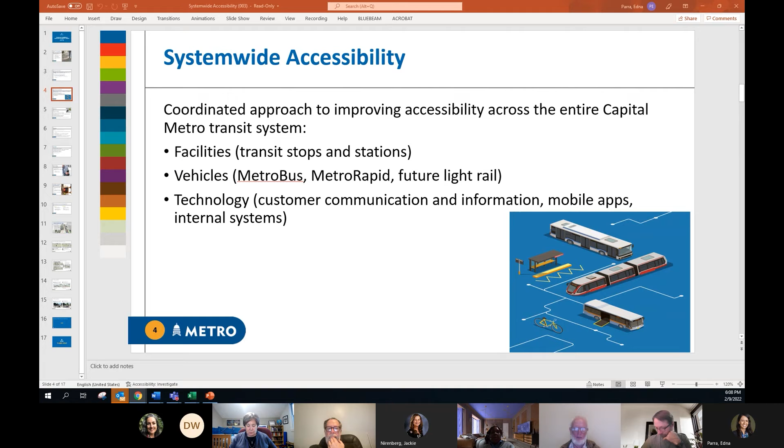Moving on to the next slide here. Let's take a little bit of time on facilities. So when we talk about facilities, we're talking about the built environment, and that's where the pedestrian meets the infrastructure. It's important to incorporate accessibility at concept and design.

When you're going to build out any of the things we're going to discuss, it's critical that accessibility be something that's dealt with on the forefront, because it's very difficult to retrofit and go back and try to readdress things. This can include pedestrian features such as sidewalks, shared use paths, traffic signals and crossings.

In regards to Capital Metro's own buildings and facilities, our facilities are readily usable and accessible to people with disabilities, and they're accessible to the public. We're able to host public meetings that are open to all manner of individuals.

Drilling down a little bit further on facilities, sidewalks are critical because access to transit begins and ends with a sidewalk. You need to make sure those sidewalks are ADA compliant, they have the appropriate widths, and most importantly, that you have sidewalk connectivity. One strip of sidewalk in isolation is not enough — you really need to look at sidewalks as something that's a connected network.

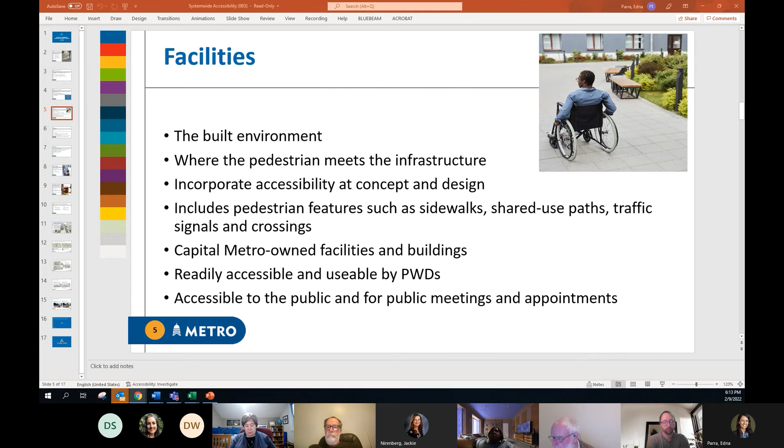Looking at our vehicles - our light rail or our metro bus vehicles - all of our vehicles on the fixed route side are 100% accessible. We were the first transit agency in Texas to go 100%, and the third in the country. We incorporate all the necessary accessibility features in our vehicles, such as ramps and audible announcements, lifts for our express buses, and securement systems. With our new electric vehicles, we're featuring the Quantum system, which is a reverse facing securement system that can be utilized without the involvement of the operator.

On our commuter rail and light rail, we will have level boarding rail platforms. It's important to be intentional about design when we're looking at these vehicles as part of the procurement processes. I've been purchasing vehicles over the last 10 or 11 years that I've been with the agency, and I participate in each one of those to ensure we've got all the right features exactly the way we want them for our local community.

We go out and work with a couple of organizations when we're trying to spec a vehicle. So we might take a bus out and try a couple different options in order to get feedback on what the public actually wants, in particular with things like securements. Once you get that feedback, you want to design a responsive scope - something we do on the fixed route side, and that'll be important going forward as we do the same on the light rail vehicle side.

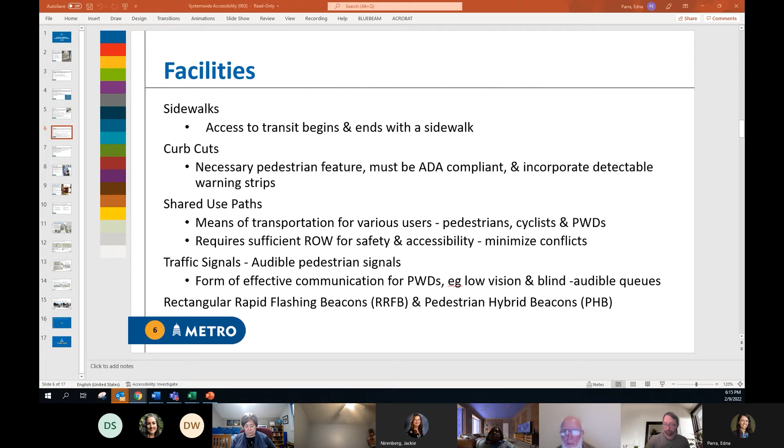Technology is another important piece. Quite honestly, technology is the type of thing that can break down barriers and eliminate some of the existing challenges that people may experience, whether dealing with the built environment or others. There are customer information systems out there that can really improve the journey - mobile apps and technologies that can provide information about the built environment, wayfinding and navigation, especially if a person is low vision or blind and cannot see signage.

And particularly about information about the built environment - how can you provide information to individuals in wheelchairs about what they might encounter as they're trying to traverse a journey?

And that just gives people a sense of ease and confidence in using our system, and that's what we want people to have.

However, regardless of all the things that we try to improve and focus on from an accessibility perspective, whether it's vehicles, facilities, or technology, there will still be individuals in our community who won't be able to use our fixed modes because of their disability and how they function with it. Recognizing that, we have the MetroAccess program that serves as a safety net for individuals with disabilities who aren't able to use those modes. It'll continue to remain a critical piece of our overall portfolio, making sure people with disabilities have transit access commensurate to their abilities.

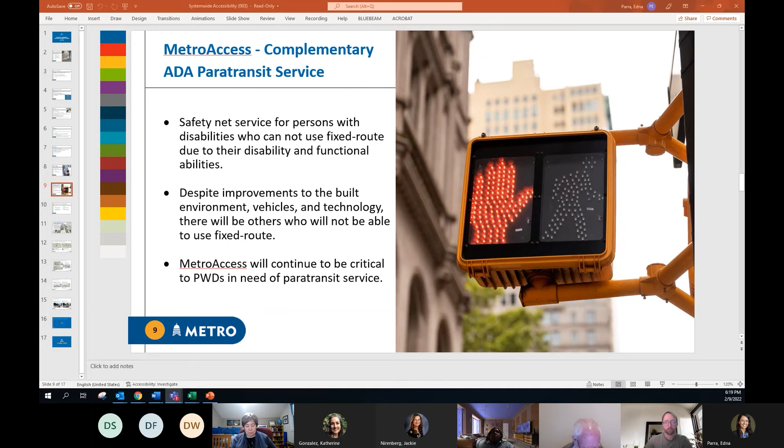Next slide, please. All of this is to say, looking forward, what could a system-wide accessible transit system look like? We could see fully accessible paths of travel across the built environment to transit facilities with accessibility features, vehicles designed for the future with all functional abilities under consideration, operating with precision technology. And then, perhaps my favorite, customer information systems that can provide universal access to improve the journey and help people complete their trips at every step of the way.

At this point, I'm going to introduce Jackie, whom I'm sure you all know well, to talk a little about how this is all coming together in the work we're doing on the Project Connect side. Thanks, Martin.

Hi everybody, again I'm Jackie Nierenberg. We've had a number of community design workshops at which accessibility has been the focus of our conversations. All of this is to develop a system that is accessible to all, with vehicles designed for the future and for all functional abilities. When we design for the folks who need the greatest access, we design for everyone—customer information systems and apps that facilitate universal access to complete the journey with information at every step. So just making the experience as easy and accessible to all as possible.

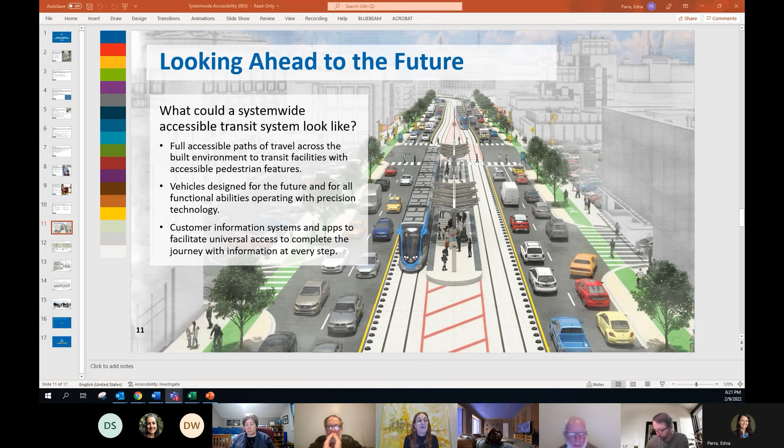So the first community design workshop we had—these are an extension of something we developed called working groups, which are geographically specific working groups along each section of the Project Connect light rail corridors. This was part of the Blue Line working group, and some of you may have actually participated.

This was for the Pleasant Valley Riverside Transit Plaza, where we explored a couple of design options for how we connect people to the Metro Rapid service from the Blue Line and vice versa, since both will be converging at that nexus. Option one explored a landscaped bridge with Pleasant Valley Road above the transit way, Metro Rapid stops located north of East Riverside Drive, and through traffic remaining on Pleasant Valley.

Option two was the at-grade Transit Plaza option, which meant the Blue Line light rail would operate on the street level, and the Metro Rapid Transit Plaza would be on East Riverside Drive, with Pleasant Valley through traffic diverted via an elongated roundabout loop.

We got a lot of very interesting feedback on access there, mostly about the length of time it would take to use option two versus option one. With option one, we got feedback about how people would get underneath to access the Blue Line—would there be elevators or escalators involved, and the problems associated with each. So a lot of interesting feedback, a lot of diversity of opinions, and both options are being reviewed based on the input we received.

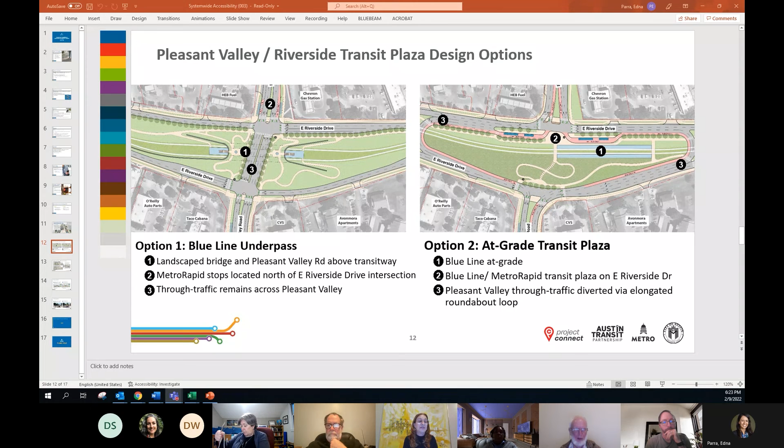The next community design workshop we held was for the North Lamar Transit Center. Again, this is a nexus of a lot of services coming together in one place, and we're trying to figure out how to make the experience between these services easy and pleasant, and above all, safe for people.

So you mean option one was preferred? Actually, option one was preferred by most.

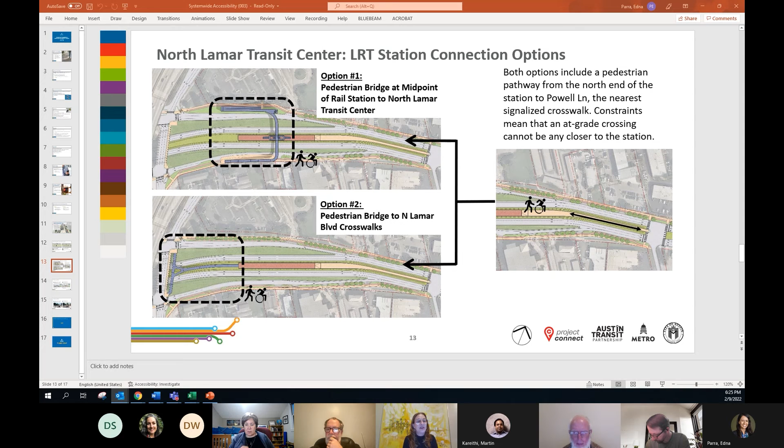This was the Drag—another tricky situation. We did this amazing workshop between variants, and we were able to do it in person at UT. Some of you may have attended. We had a huge turnout—not only students, faculty, and staff, but also community members, business owners, etc. Lots of stakeholders interested in what's going to happen in the Drag, which is a super constrained area.

We talked about two design options. One was to include both traffic bus lanes in addition to the light rail, and try to fit everything into that one space.

The other option was to remove vehicular traffic and make it more of a transit mall. We had a lot of good input, and it's interesting that students really liked the transit mall option. I think they saw it as a safer way to access the university, the West Mall. We had a variety of opinions from staff and community members. Obviously, business owners were concerned about how this impacts their business. So there's a lot to be considered, and again, no decision has been made. We're taking both options forward to 30% design, but we got some really good input on what people consider to be safe.

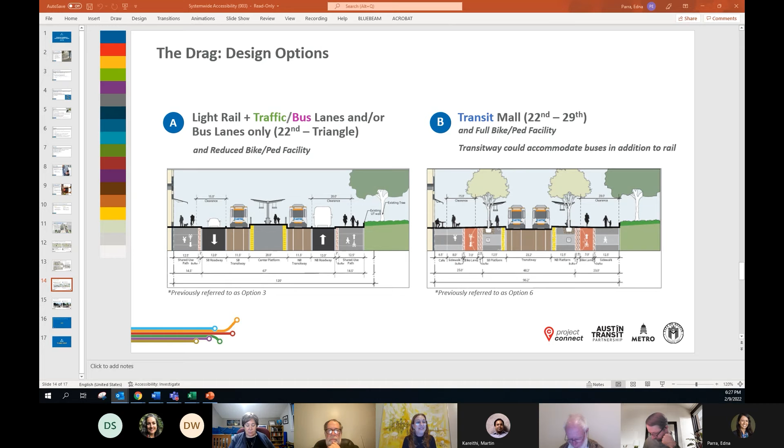I think we have one more slide. The last slide shows renderings of what those options could look like. So we were able to show those and give people a better idea of what we were talking about when we moved to the transit mall option versus including vehicular traffic.

On the transit mall, and with these different meetings we had, safety of course is paramount. But with the transit mall, you get so much additional space. We hear from people with accessibility needs that you can provide more space for pedestrian access, going back to the multimodal facilities and shared use paths. With that kind of space, you minimize conflicts that might exist between cyclists or folks with any manner of disabilities.

When you're looking at the bridge, whether it's the North Lamar piece or the discussion we had at Riverside, we had a lot of comments about elevators and whether there are alternatives to elevators, just because of all the issues we have with those, and ways for folks in wheelchairs, whether power or manual, to get down and through those things. We've been fortunate to have some really good drill-down sessions, some very specific to just accessibility, and we continue to hope to do that, getting specific feedback on accessibility for members of the accessibility community who walk, wheel, and cane through these environments.

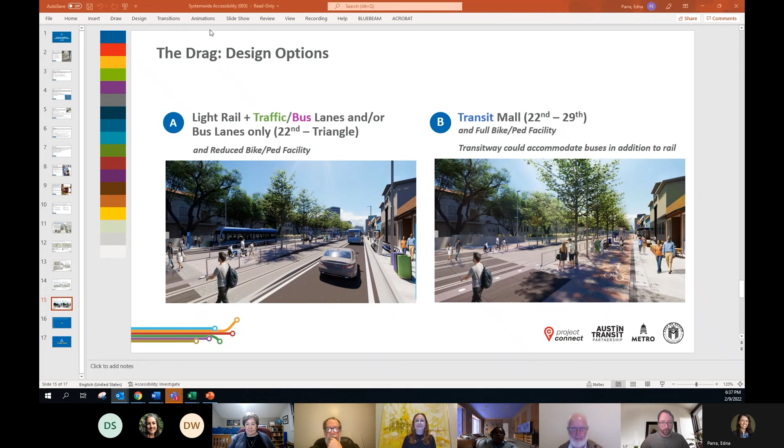I think I'll share my screen. Oh, where's my little share screen deal? Yeah, I think I stopped sharing my screen, so you should be good to go. Let me know if you have issues. Oh, or there it is. I see it. Sorry, okay. Was on Zoom earlier today, and it messes with me. Okay.

All right, so I'm here to give you all the latest.

Other grants could flow in, people could follow the money, right? That was really important for transparency's sake. And just to give you an idea of what buckets, because it gets kind of confusing, who does what, and honestly we're still working through roles and responsibilities. But to put a broad brushstroke on it, the Austin Transit Partnership is in charge of implementing the Orange Line, the Blue Line, the Downtown Tunnel, and the Green Line, which will be the future commuter service from downtown to Colony Park, and the infrastructure and facilities that go along with those. Capital Metro still operates the Metro Rapid Service, the Metro Express, the neighborhood circulators called Pickup, Customer Technology, and the Red Line. The City of Austin's domain is the anti-displacement investments, handled by the city's Housing and Planning Department, utilities relocation, permitting, and right-of-way. That's at least a high-level overview of our roles and responsibilities.

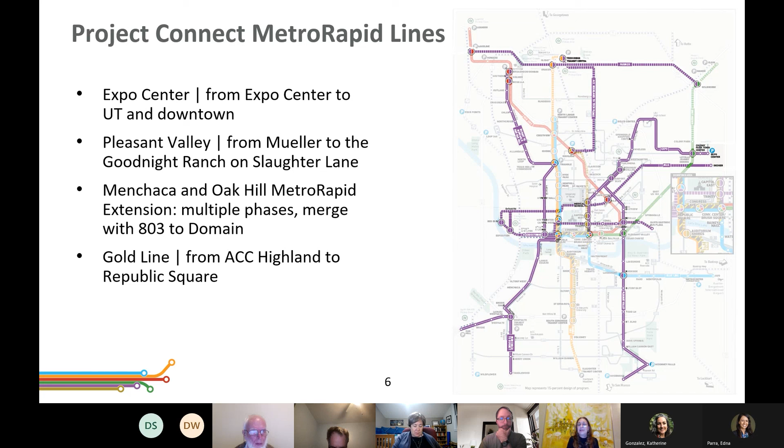I don't know if I need to go through these Metro Rapid lines, but we'll talk a little bit more about Metro Rapid, and Katherine is going to talk more in depth about those projects, so I'll just cover that all.

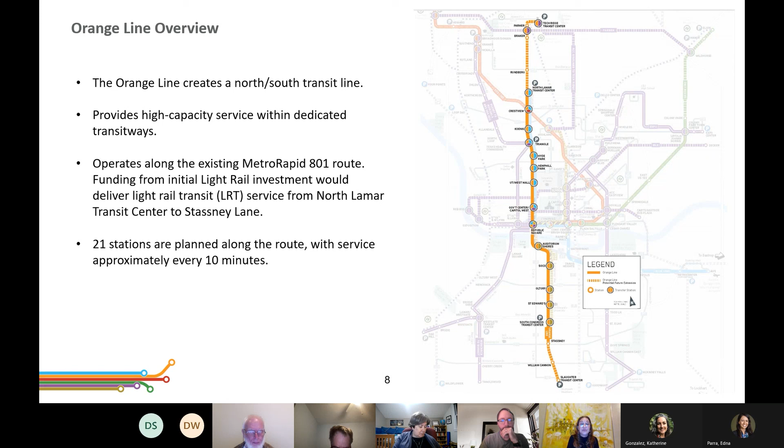Just a reminder about the Orange Line: it's the north-south transit line providing high-capacity service. It operates along the existing Metro Rapid 801 route, and funding was from the initial light rail investment. It would deliver transit service from North Lamar Transit Center to Stassney Lane, and includes 21 stations with service approximately every 10 minutes or less.

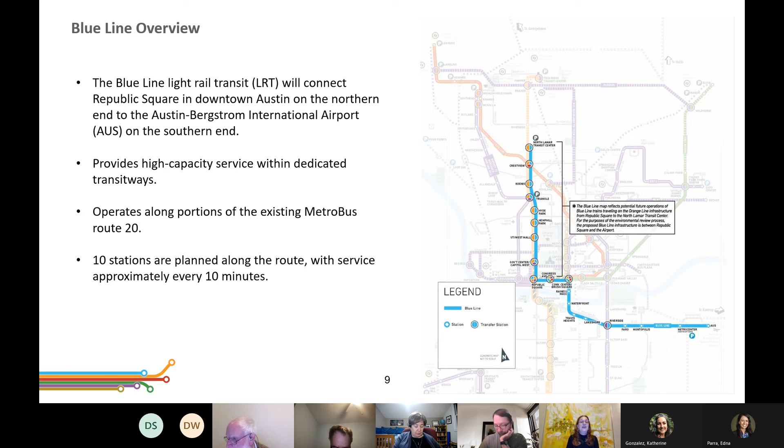And the Blue Line, as a reminder, connects Republic Square in downtown Austin to the Austin-Bergstrom Airport. It provides high capacity service, operating along portions of the existing Metrobus Route 20, with 10 stations and service approximately every 10 minutes or less.

I wanted to show the timeline of where we are with the Orange and Blue Lines. We're still really early in the process, and I want to emphasize that we have ongoing community engagement and involvement. We're always open to feedback.

We have a feedback email, feedback@projectconnect.com, and we're always open to coming and giving updates to committees like ours, but also neighborhood groups and civic organizations. We've even done updates in people's living rooms for smaller organizations. So we are open and available.

I mentioned that in the summer we're achieving two major milestones: the 30% design mark and the draft environmental impact statement. So we are right between that scoping and that milestone this summer, and then you can see how it all flows from there.

All the way down to the grand opening, which we expect to be somewhere around 2029, fingers crossed.

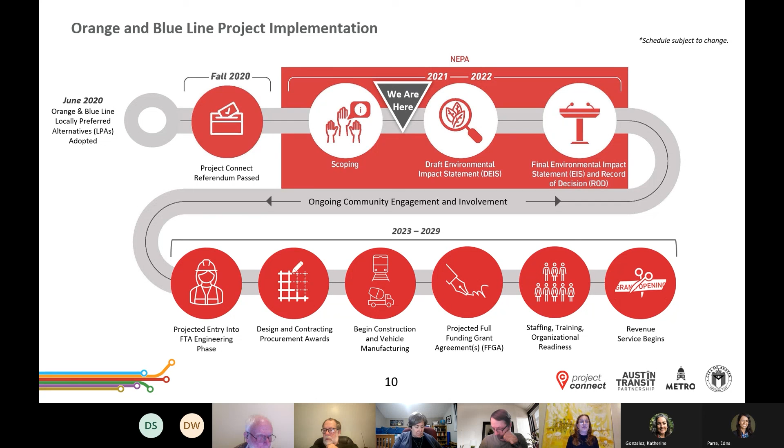A little bit about community engagement. We've done quite a bit, and it's been a challenge. Like the chair was saying, it's not ideal to engage on such highly technical and on-the-ground projects in a virtual setting.

But we've done the best we can, and now we're starting to supplement with our at-stop outreach and block walking and all the things that make the difference in connecting people to information, because we realize that most people do not engage with us at our meetings.

I will say the virtual meeting is probably going to stay in our toolbox, because we've gotten so much more participation, like triple the amount we had when we were doing meetings in person. It's just much more convenient for a lot of people, so it's likely to stay as a major part of our engagement effort.

But we still are missing people who don't have time to engage with us on our terms, who are not digitally connected or digitally comfortable. So little by little we'll start adding back as many in-person opportunities, but likely those opportunities will be focused on what we call our priority communities, the people who need our services the most.